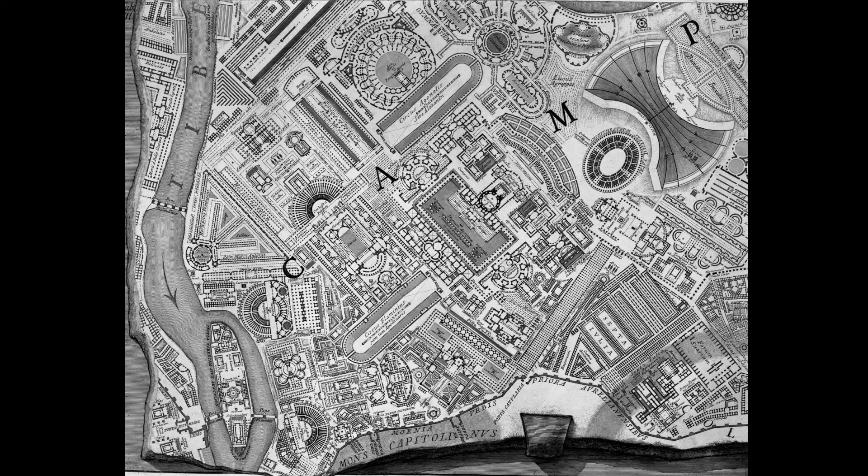I'm back with another video on architectural design, this time to talk about a topic that is one of the most important in our profession, the relationships between buildings and their surroundings. Despite the fact that human behavior has changed a lot recently, almost nobody likes to be ignored or disdained when he or she gets to a place without knowing anyone. Neither does architecture.

Architecture likes that its components relate well and that a building is not a visual or functional aggression for anyone. This is precisely what can be called courtesy in architecture. That when two buildings, two spaces, or two materials meet, they fit together well, and that this fit favors a permanent relationship. When intervening in any environment, we have two alternatives: integration or contrast.

The experience accumulated in cities shows that integration is in general the most correct attitude, as it values the existing, establishes continuity with the historic city, and makes the inhabitants of the city feel part of a continuous historical evolution. However, this does not mean giving up a formal identity of its time for any new building.

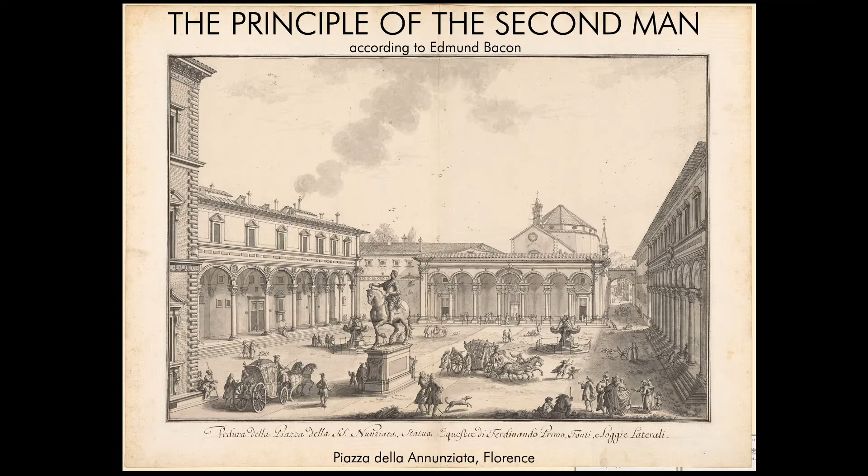In his book Design of Cities, he illustrated the concept by showing what happened in this square, the one we're looking at in this engraving here, the Piazza della Annunziata in Florence, Italy. It begins in 1427, when Brunelleschi remodels the old Ospedale degli Innocenti, employing Roman elements in a way that had never been done before. That is, building a portico with arches supported by columns.

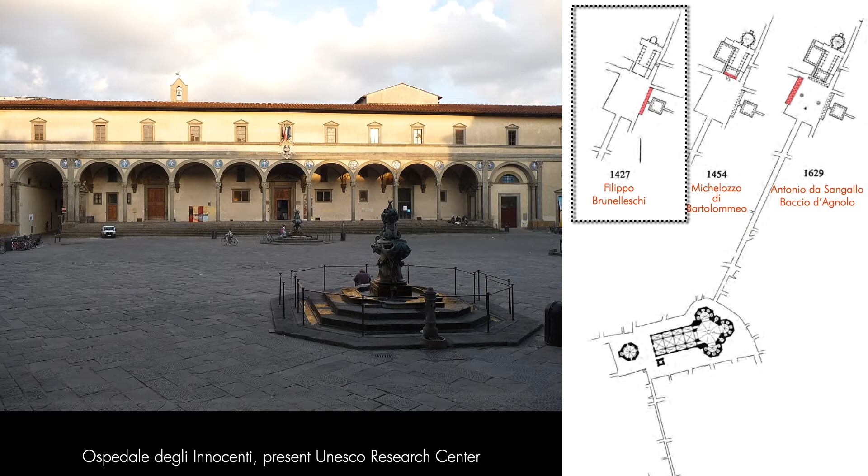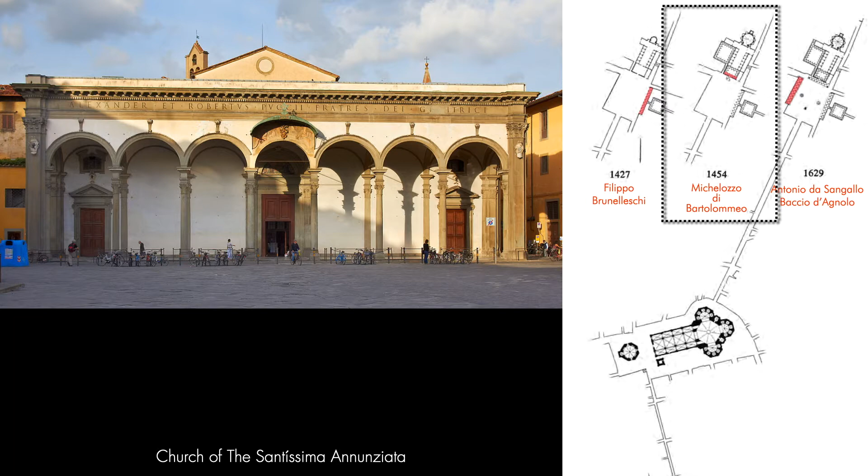27 years later, Michelozzo is hired to finish the Church of the Annunziata, and he does so by imitating Brunelleschi's portico. Almost 2 centuries later, Sangallo and D'Agnolo built a loggia across the square from the Ospedale, and what they essentially did at the building's facade was to mirror Brunelleschi's portico. This way was created one of Florence's most consistent and unified urban spaces. No wonder it is one of the most visited sites by architects and tourists.

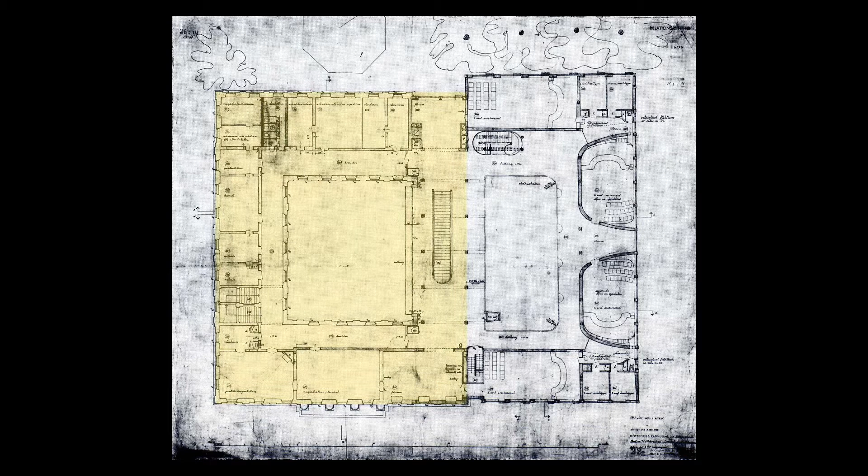Ignazio Gardella intervenes in Venice, seeking formal closeness through volume, texture, color, even drawing on the existing architectural elements. This strategy was adequate to that situation because it maintained environmental values, but it soon proved to be difficult to generalize because the use of local elements literally implies a forced submission to the surroundings.

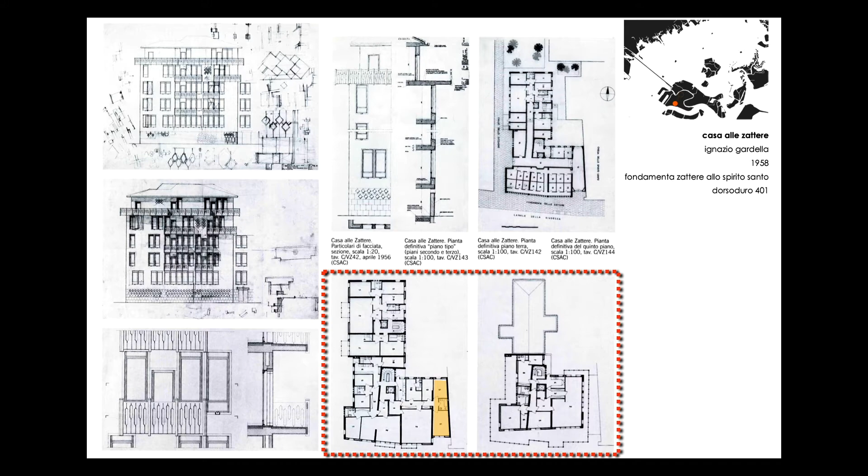One interesting aspect of this new building in Venice, one of the few new buildings, is that it employs the same strategy as employed by Asplund in the Law Courts addition. What I mean by that is that there is a slice of building which is set back in between the Gardella building and the church, which sets them apart. And this can be seen also on the plan. The yellow part is the part set back, which helps the architect to make the connection.

Aalto was very sensitive to the context of his buildings. Here we will see three interventions in the same area of Helsinki. In the three projects, the facades consist of metal grids in which the openings predominate, unlike what happens around them. However, these grids absorb the height of the floors and openings of the neighbors, which already establishes a positive relationship between them. But what really makes these buildings fit into their surroundings are their specific volumetric configurations.

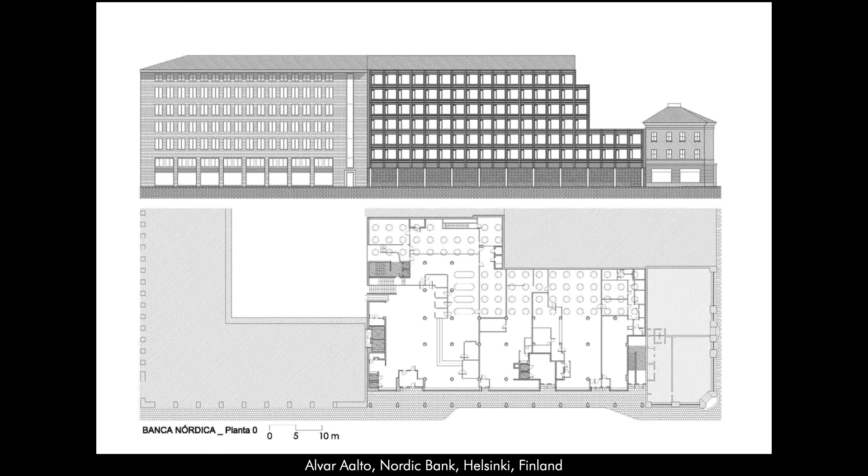At Rautatalo, the volume is equivalent to that of the neighbor on the right, establishing no relationship of height with that of the left. At the Nordic Bank, the overall form is broken, adopting different heights on each side. The third building, the Academic Bookstore, completes the corner and continues the street facade on both sides.

It is still worth emphasizing the quality of the interior space of two of these buildings, both with triple height and lighting from above. This is the atrium at the Nordic Bank, and this is the space inside the Academic Bookstore.

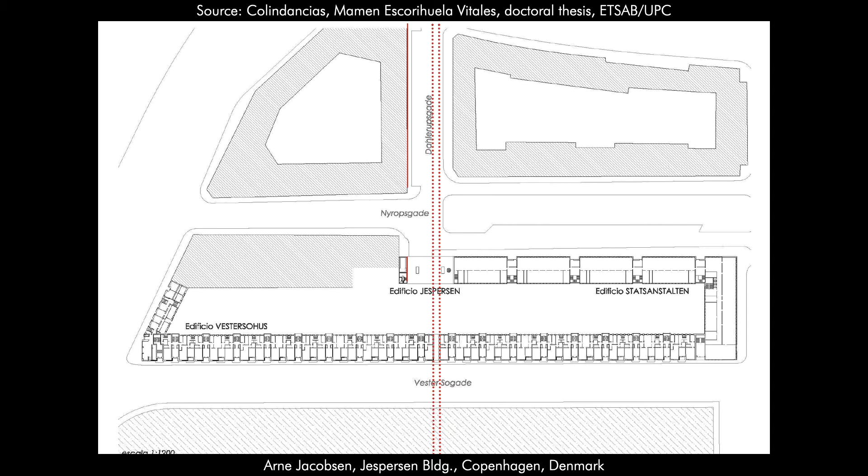Jacobsen's building for the Jespersen Company fills a gap in the inhabited wall that defines a huge block. Here he opts for a very discreet, almost neutral building which barely touches the floor to allow vehicular access to the interior of the block.

But this apparent discretion hides an ingenious technical solution. Since the building is supported by a structural system that resembles a tree, there are no pillars on the facades, and the slabs unload on beams in the center of the plan, which in turn transfer the load to two single pillars positioned so as to leave free space for the cars to pass.

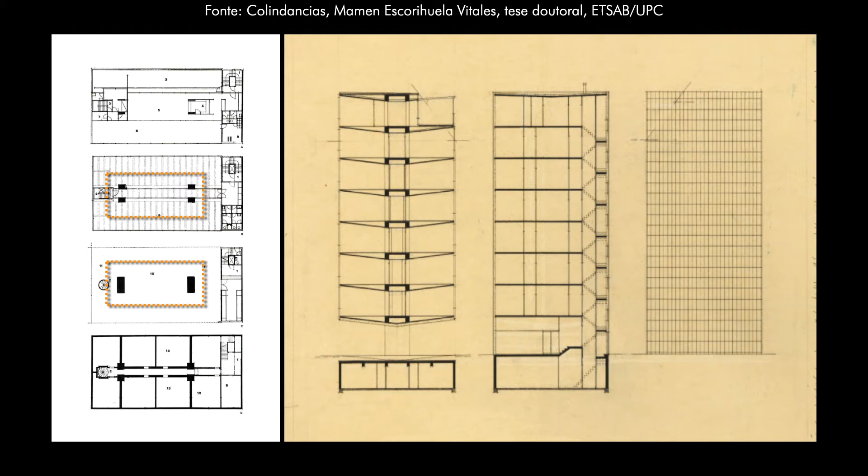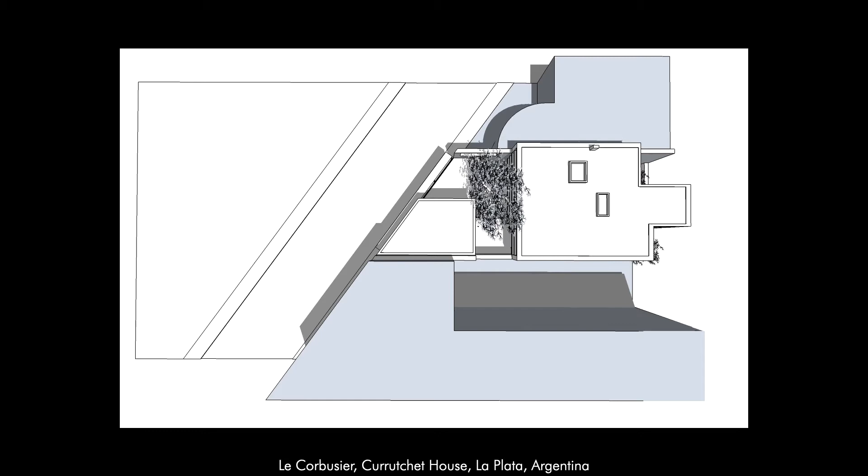Le Corbusier solves here a difficult problem due to the extension of the program in comparison to the limited area of the site, without losing sight of the visual integration with the neighboring houses, which he did not even know personally. Using different elements, he does something similar to what Aalto did at the Nordic Bank. That is, on each side, the Curutchet house has a height compatible with its respective neighbor.

In the PepsiCo building, Gordon Bunshaft solves two problems at once. He locates the service core on the interior boundaries of the site and recedes the core on the Park Avenue side, lined with black granite, which gives it autonomy in relation to the adjacent building, a solution similar to that of Asplund in Gothenburg and Gardella in Venice.

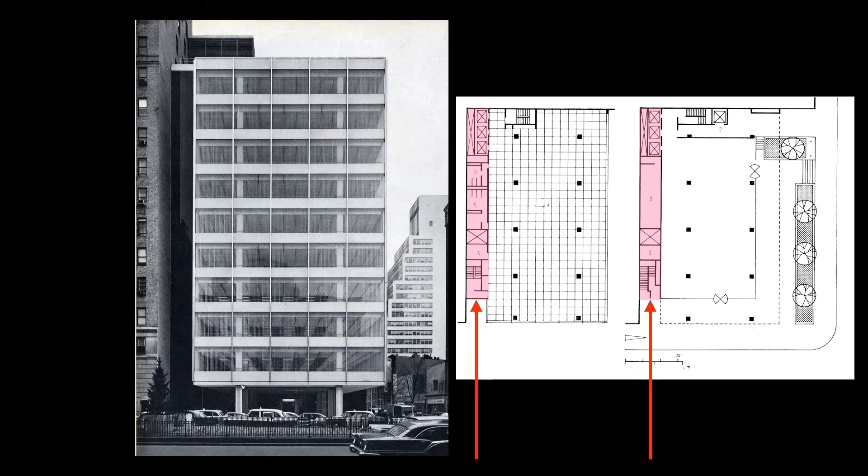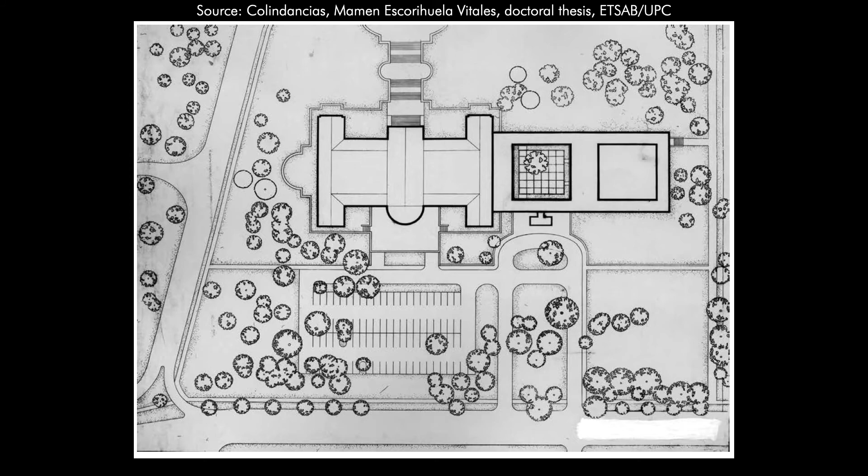The expansion of the Albright-Knox Museum was a difficult problem, since the building to be expanded was a complete and symmetrical form in neoclassical style. The solution found by Bunshaft is extremely qualified. It keeps the existing facades intact, without breaking their symmetry, and proposes that the expansion should have only one floor, the height of which coincides with the base of the old museum, precisely the line from which the Ionic columns start, configuring a podium.

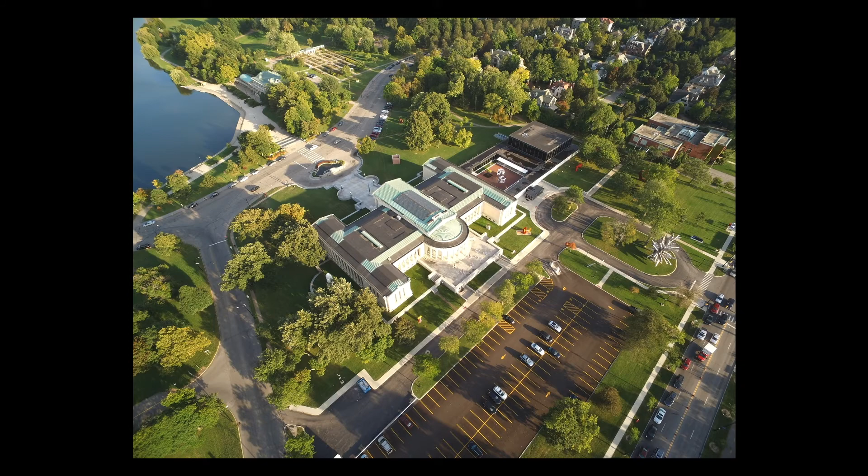On this low rectangle, aligned with the longest axis of symmetry of the old building, two squares are inscribed. One of them is a patio towards which the restaurant and administrative spaces are turned, and the other an auditorium, the only element that stands out and up from the podium top level, although without touching its edges. A solution that is both modern and committed to preserving the original building.

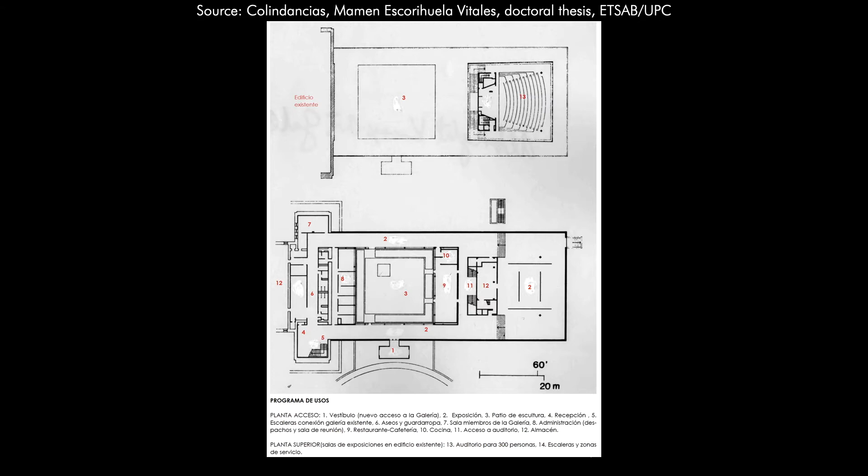Mario Roberto Alvarez was one of the most important Argentine architects of the 20th century. In the AMAX building, he manages to vary the height of the building, making each end coincide with the neighbors' heights. The tray layout of the building, kind of vertical stacking of trays, helps a lot in this regard.

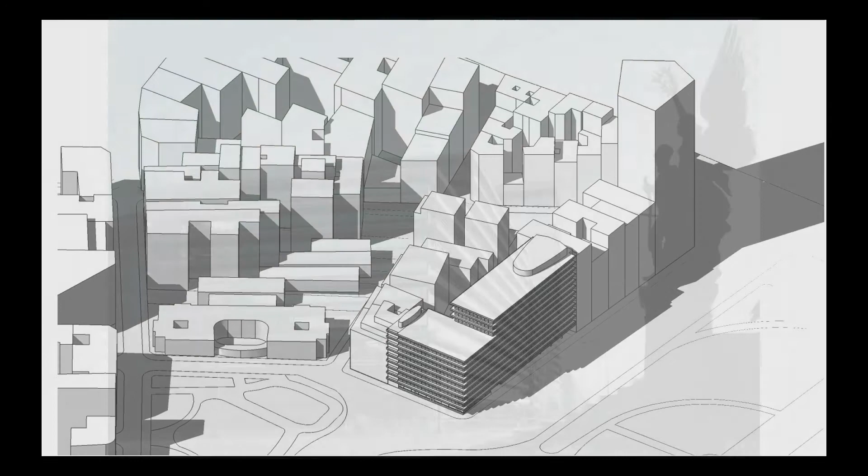The second project by Alvarez demonstrates an enormous sensitivity towards urbanism and the role of the architect in the construction of a city in which it is good to live. Instead of building a huge tower aligned with the avenue, Alvarez decides to separate the program into three blocks. Two of them have the same height as the neighbors and flank an open space that joins the street.

The third block is a tower that is almost twice the height of the first two, but is placed at the back of the site, minimizing its impact on the street and configuring the third side of the space that the project offers to the city.

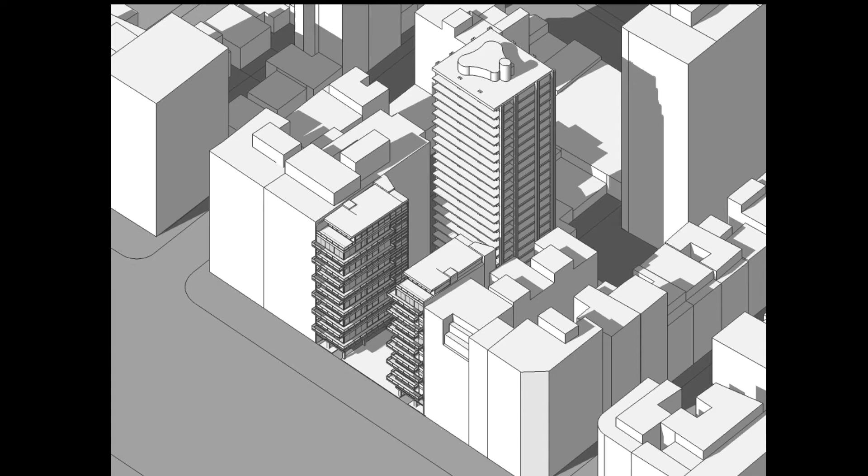This is the first major work of Kahn's career, realized when he was over 50 years old. Having to expand the Yale University Art Gallery, Kahn's project adopts an attitude of modesty and respect at the same time that features of his mature work start to appear. The new wing is a block made up of three space units, two larger ones for exhibitions and a narrower one in between that serves them.

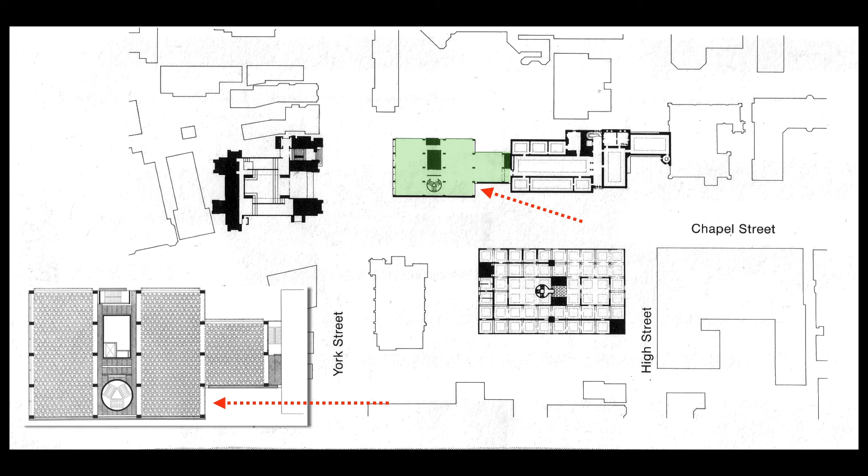The contact with the old gallery is made through another narrower space, which creates a recess on both sides of the connection, giving a certain autonomy to both parts of the new building. Two other decisions reveal Kahn's supporting role for the new wing. The access to this part is through a door in a glass wall perpendicular to the street, making it less visible, and the facade of the main street has no openings, which directs one's attention to the existing access in the older part of the building.

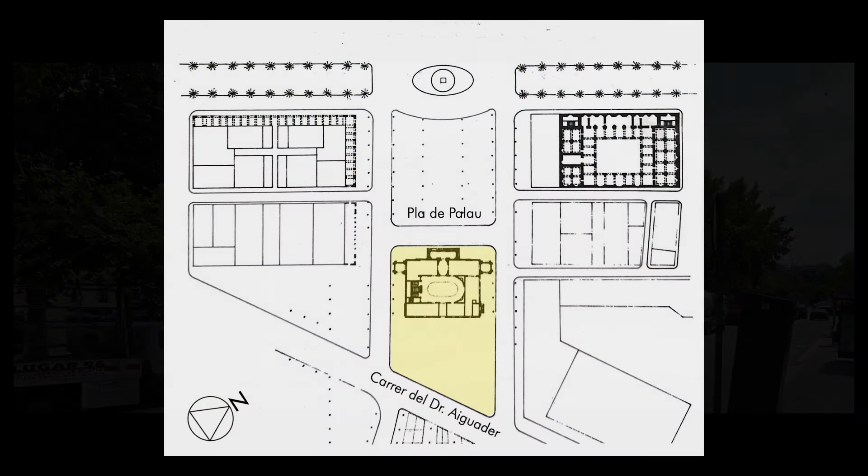This is a competition for the expansion of the Naval School of Barcelona, whose headquarters is a neoclassical building with three floors, organized symmetrically in both directions, although the symmetry is only manifested in the facades that are on the shortest axis. In yellow, the site of the competition and the existing building. The project submitted to the contest seems to have undergone an evolution consisting of several stages. The first one is somewhat obvious, as it makes the main facade parallel to the avenue that cuts the rectangular plot diagonally.

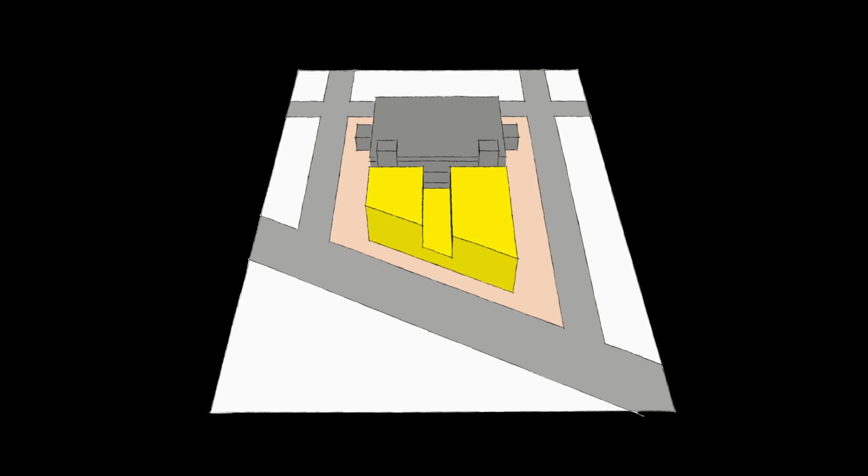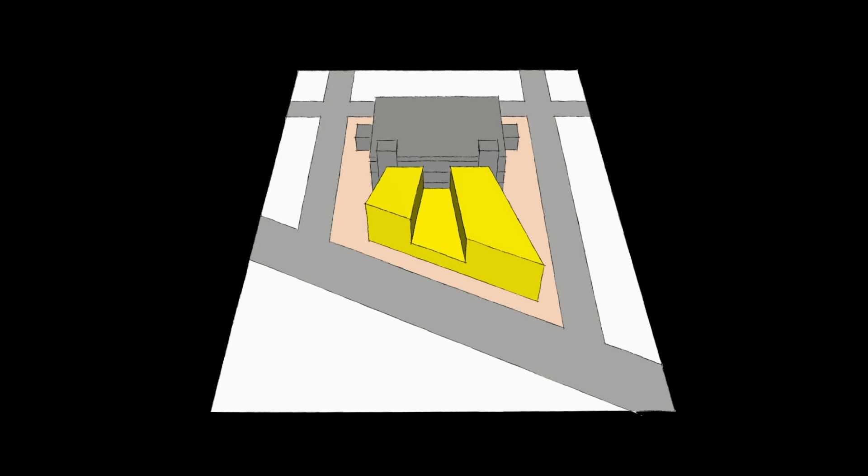In the second stage, the block of the addition loses a central part and is turned into a U shape or a base plus two elevated bodies. The third step consists of cutting the sides at an angle to expose the towers in the corners of the school building. And the fourth one, a very subtle one, the top of the extension is tilted towards the school. The result of this is that someone passing along Dr. Aiguader Street, the diagonal side of the site, will constantly see parts of the old school building behind the new wing. The existing building never disappears behind the addition.

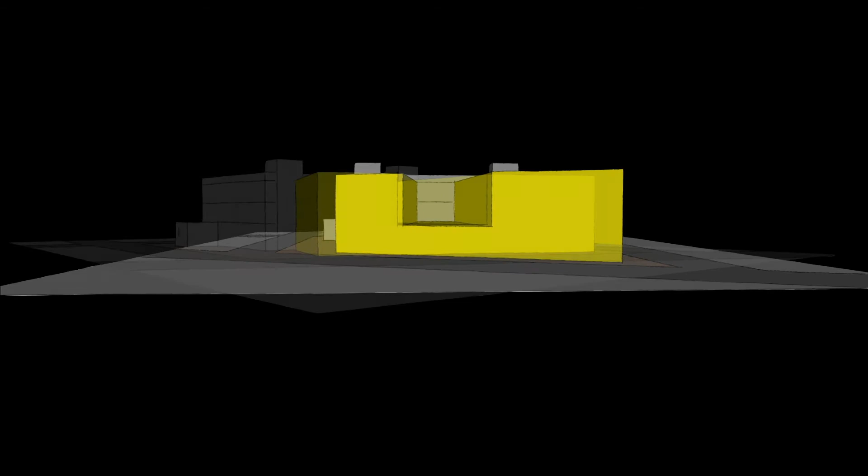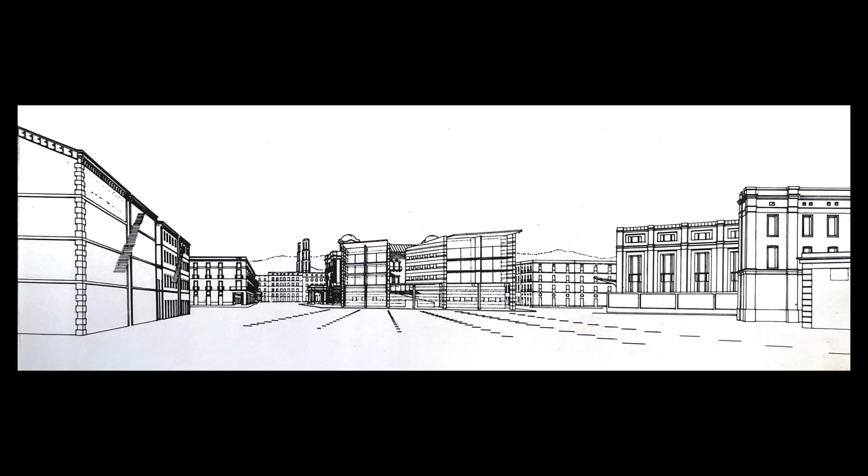Here we see two perspective views submitted to the competition, which always show the old building through the center of the U-shaped new addition, and here passing along we see the new with the old, and also we see the effect of tilting the top of the building towards the old building. A brilliant solution in which the existing building is highly valued by the expansion, while the expansion has its own identity. It's a shame that it was not built.

In a video in which he talks about his work, Alberto Campo Baeza spoke of the interest aroused by the opportunity to design the Museum of Andaluzia, as it allowed him to build a piece of a city by relating it directly to a previous work, the headquarters of Caja Granada, a building that contains one of the most striking interior spaces in recent decades. Having adopted a parti, there is a formal strategy in which the museum would be an elongated rectangle with a vertical element at one end.

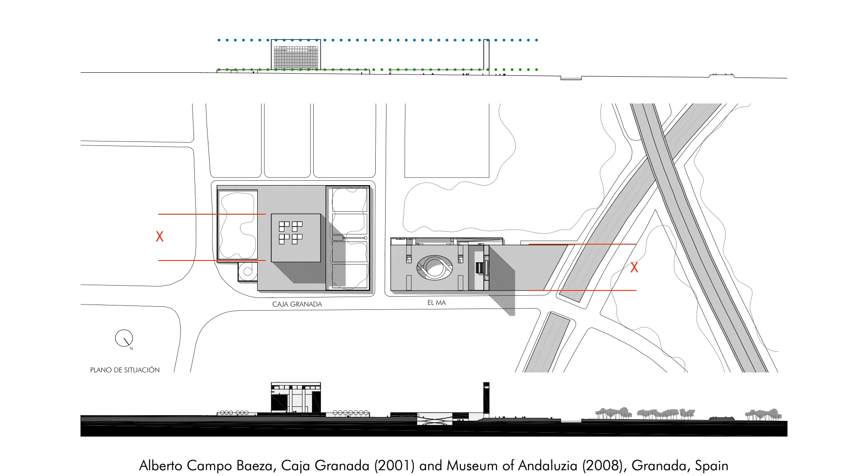Campo Baeza established the connection with the Caja Granada in two ways. The whole building would have the same width as the Caja's cube, and the heights of its two constituent parts, base and tower, would coincide with the height of the base and the cube of the Caja, respectively. These relationships are easily perceived when one sees the two buildings together at some distance.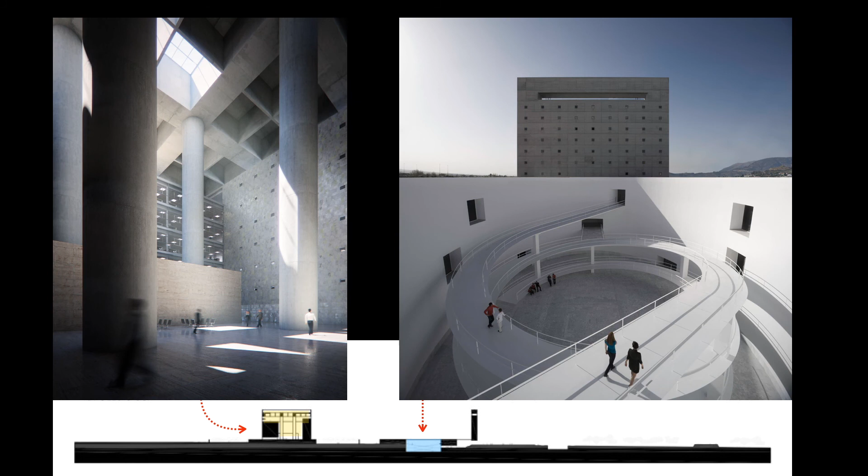One aspect to remark is that both buildings are deceptively simple. While inside Caja Granada there is a fantastic space that reminds us of the Pantheon and certain Boullée projects, the Museum of Andalusia box hides within it an elliptical courtyard occupied by intersecting helical ramps. Nothing outside prepares us for the amazing spaces that can be discovered if one enters these two buildings.

The Previsión Española headquarters building defines once more the perimeter of the old city, consolidates the city's road structure, gives access to the interior of the block through two passages, and, due to its horizontality, refers to the old city wall and sets off the Torre del Oro, an important monument located in front of it.

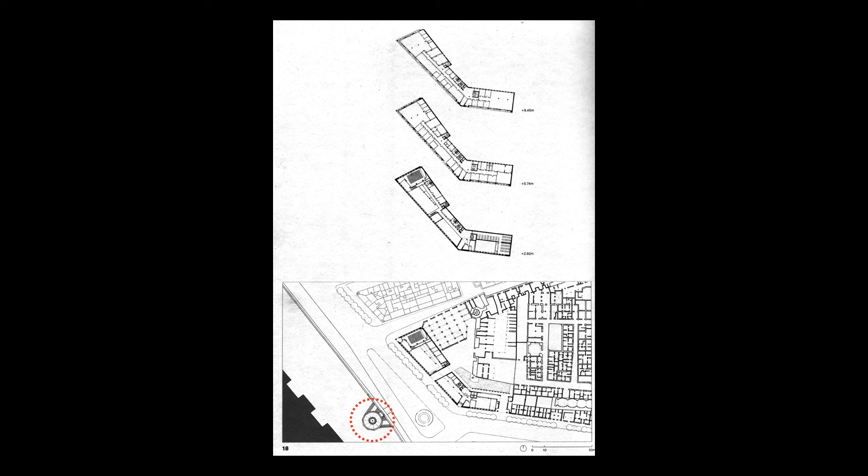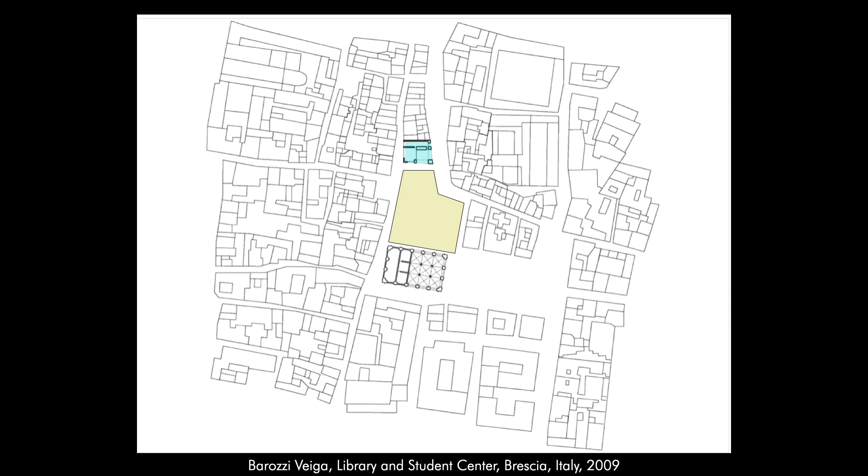The library and student center by Barozzi Veiga at the same time defines the end of an existing block and defines one side of the square without resorting to any stylistic dialogue with its context. The fitting occurs through the dimensions of the new building and its position in relation to the surroundings.

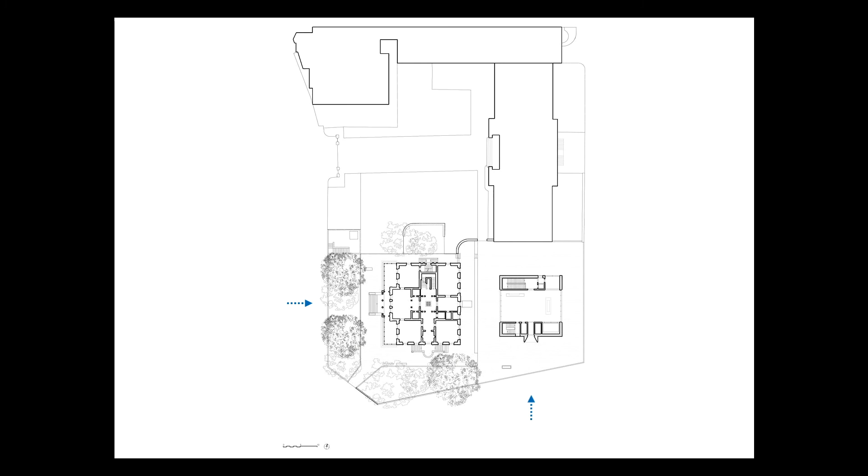To end this video, another building by Barozzi Veiga, this time a museum in Switzerland, which shows a smart way to double the museum space without touching, apparently, the existing building. The extension looks like a freestanding building since the connection to the older building is underground. Also noteworthy is the layout of the plans, which take up the Palladian theme of the main building.